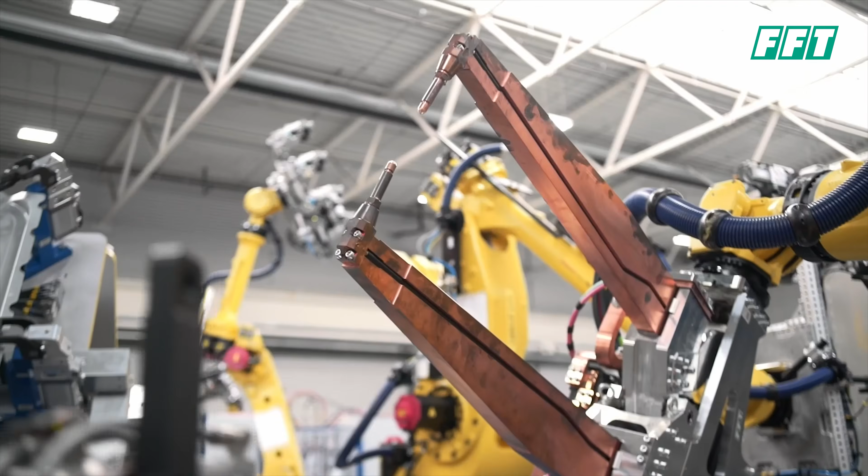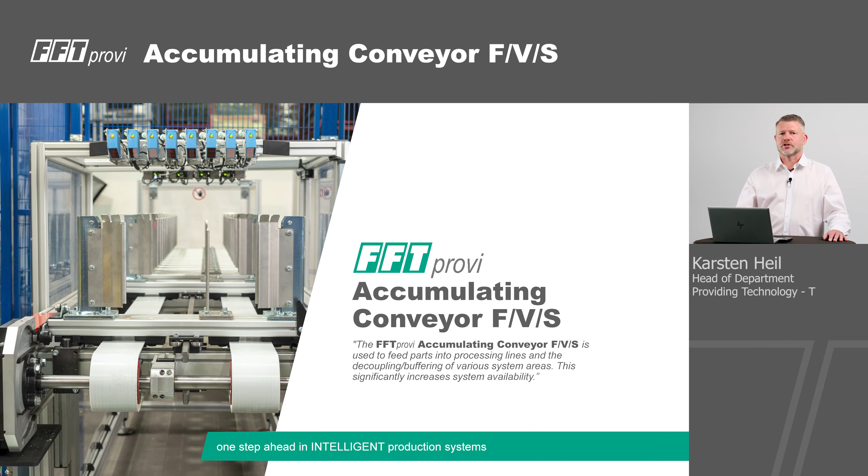This type of conveyor has been available on the market in its basic form for more than 20 years and is used successfully in automotive production and other areas worldwide. The accumulating conveyor is used to feed parts into processing lines and for decoupling and buffering various system areas. This significantly increases system availability. It enables decoupled component feeding, is based on a modular and stable aluminum rack, and impresses with its very smooth running by using a maintenance-free curved toothed belt.

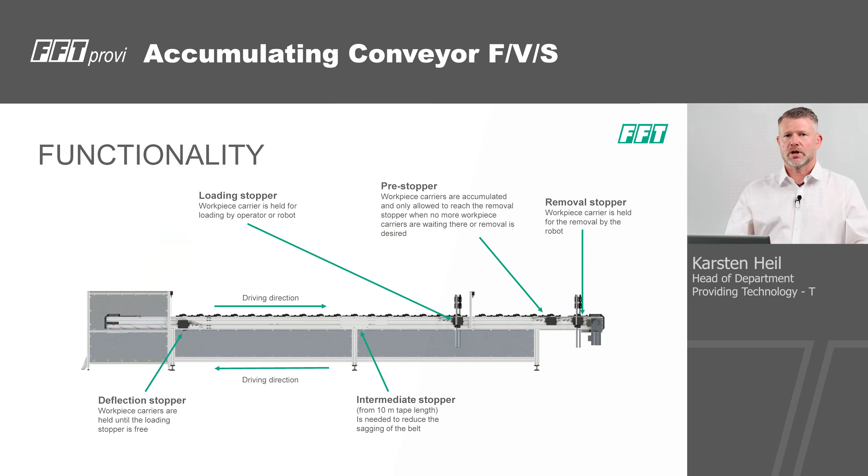We build this conveyor in 3 designs. The floor-mounted version, in this example with a safety device for loading by a worker. The vertical version, in this example also with a safety device for loading by a worker. And the steel version, in this example with a steel structure and a maintenance platform.

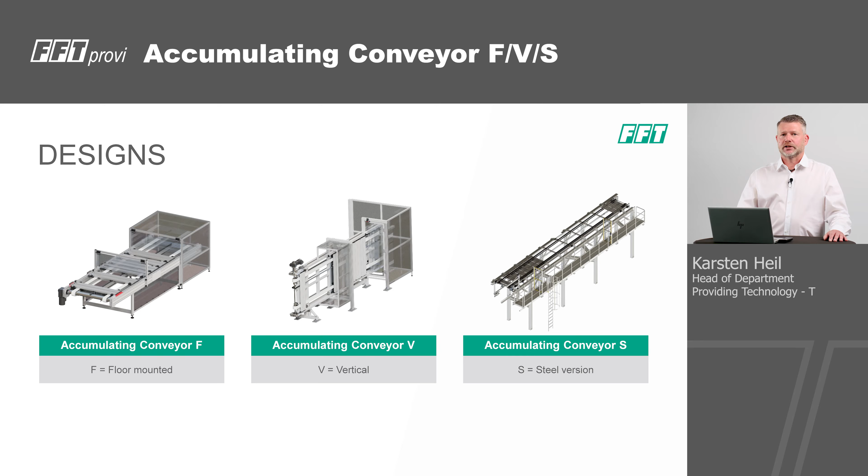Let's move to the technical data of the conveyor. Length from 2000 to 40,000 millimeters. Width from 400 to 2000 millimeters. The weight depends on the version. The conveying speed is 0.1 meters per second. And we position with an accuracy of plus minus 0.5 millimeters.

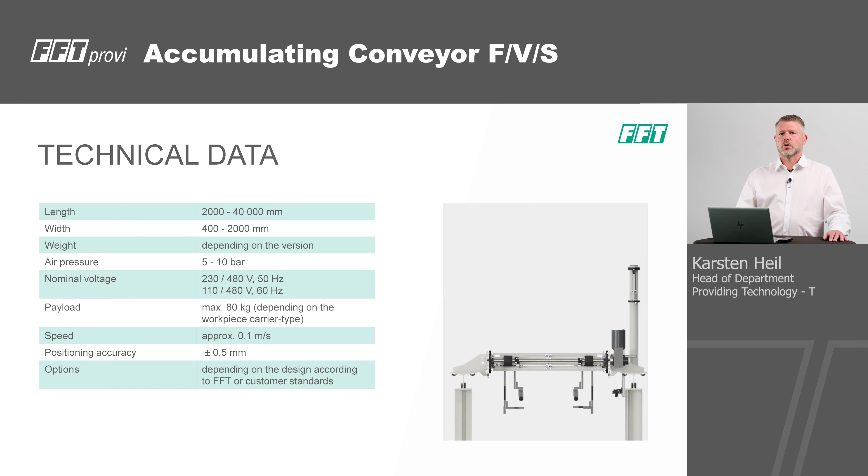Our portfolio also includes many possible additions for safety, ergonomics, and component monitoring.

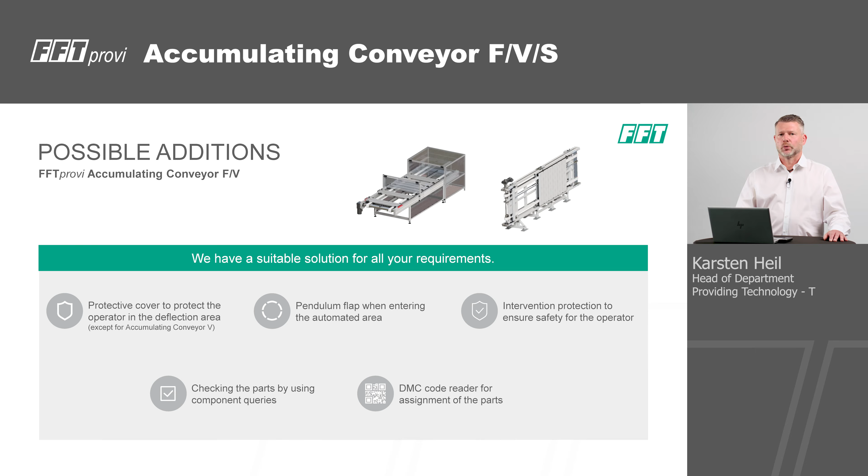So the advantages and benefits for our customers are increased flexibility through coupling of several workpiece carriers and various buffer distances. Modular design with stable aluminum rack. Cycle-controlled part feeding. No lubrication and no automatic belt tensioning necessary. Cable routing within the aluminum profile. Extremely smooth running by using a maintenance-free PU belt.

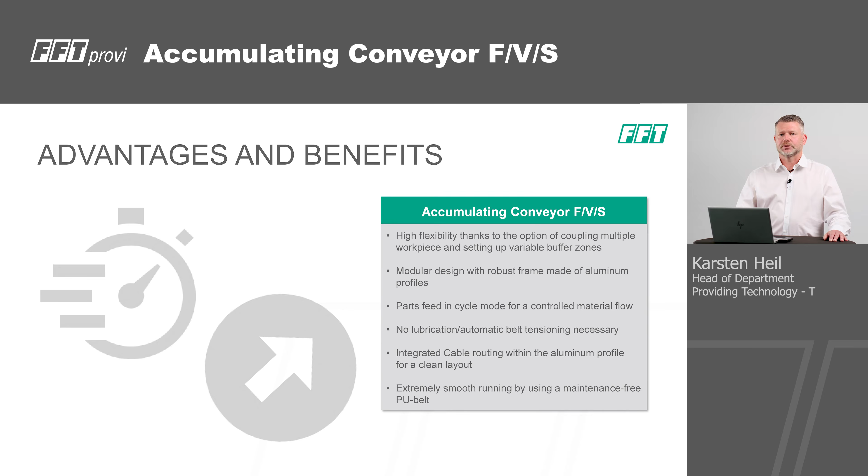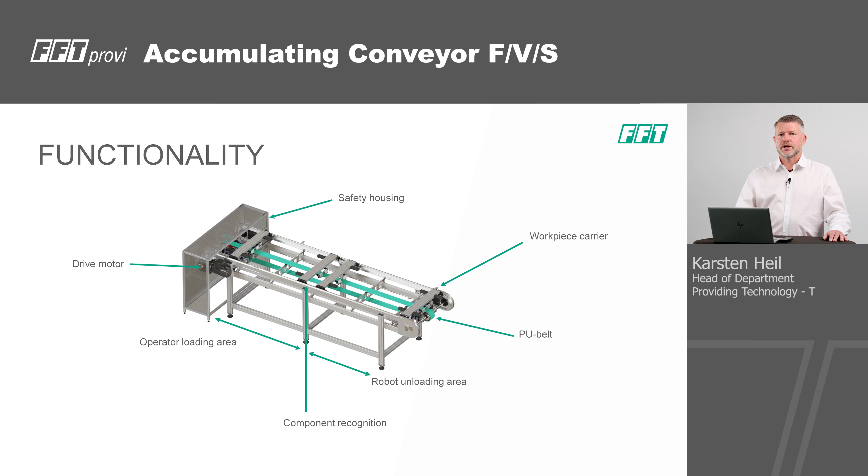Finally, a brief look at the next generation of the FFT provi conveyor. We have put 20 years of experience into the design of this new product. The floor-mounted version is about to go into serial production. The vertical and steel versions are about to undergo long-term testing.